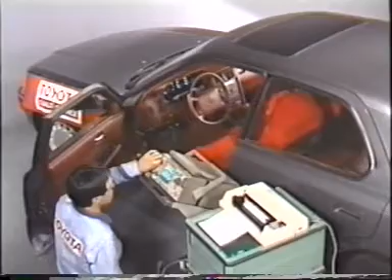Electronics, the science that plays a leading role in the progress of modern civilization. Most systems in a modern automobile include microcomputers that control them very precisely to enhance the car's drivability and reliability. These systems are controlled so closely with each other that it is essential for service personnel to fully understand the electrical systems used in the car and to perform troubleshooting jobs accordingly.

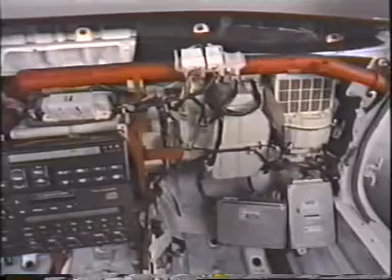This video is designed to help you understand the body electrical system and the principles of troubleshooting by using some of the electrical systems found in the LS400 as examples.

First, we will study the major wiring system and how to read electrical wiring diagrams. Then, we'll learn about the SRS airbag system, the memory system, the wireless door lock remote control system, the theft deterrent system, and the combination meter in that order. For each system, we'll first learn how the particular system operates, the key points of the system, and then the method of troubleshooting that system. Some troubleshooting repair methods will also be explained.

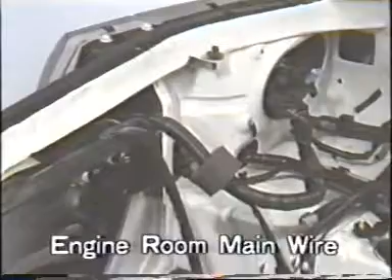We will start with these four major wiring systems. This is the main wiring harness in the engine compartment. It is connected to the fusible link box, junction block number 2, headlights, water temperature switch, engine hood courtesy switch, horns, etc.

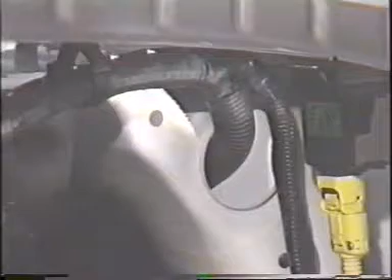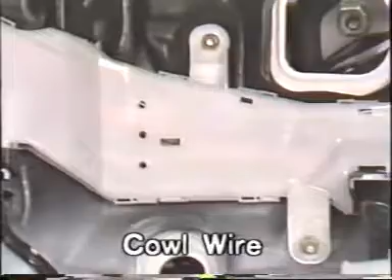This is the cowl wiring harness. It is connected to the front airbag sensors, theft horn, the mirror ECU, theft deterrent and door lock control ECU, tilt and telescopic ECU, center airbag sensor assembly, junction block number 1, junction block number 4, ignition switch, etc.

This is the instrument panel wiring harness. It is connected to the combination meter, rheostat, mirror ECU, luggage compartment door opener, remote control mirror switch, wireless door lock main switch, air conditioner control assembly, radio and tape player, junction block number 3, etc.

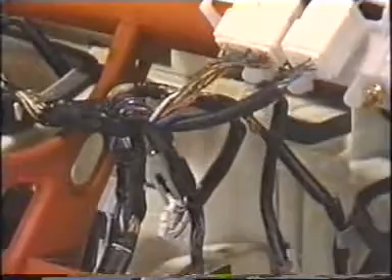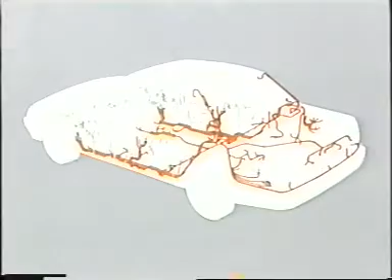And this is the floor wiring harness. It is connected to the O2 sensors, fuel pump, fuel sender, fuel lid opener solenoid, wireless door lock ECU, luggage compartment door lock solenoid, CD automatic changer, door courtesy switches, etc.

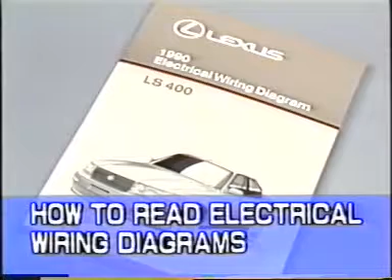Next, we'll see how to read the electrical wiring diagrams for the LS400. Suppose you wish to inspect the SRS airbag system. First, look at the items under the heading System Circuits, and look for the item SRS airbag. On the page indicated, you'll find special precautions about checking the airbag system, as well as the circuit diagram for that system.

On the diagram, you will find numbers and letters indicated. For example, 19IH3. The box itself indicates a connector joining wire harness to wire harness. The letter I indicates the connector is located near the instrument panel. H3 is a code that identifies the connector. The number 19 at the left side of the box is the pin number of that connector.

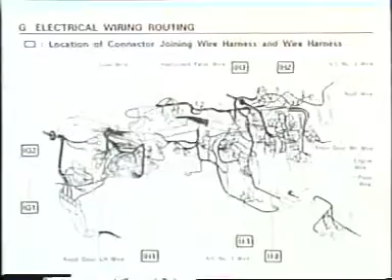Looking at the page following the wiring diagram, you'll find a reference to the page that shows the location of the connector, plus an explanation. Then, by turning to the page indicated, you can easily locate the position of connector IH3 on the body.

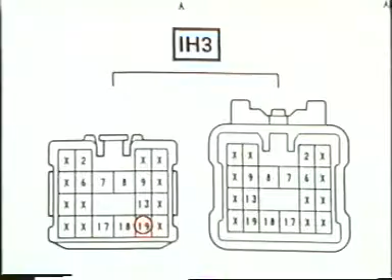On the following page, you will find the illustration of the connector, together with the pin numbers of the male and female connectors. Pin number 19 is located here and here. As you can see, pin 19IH3 is located here. Reading electrical wiring diagrams is easy when you refer to the vehicle carefully.

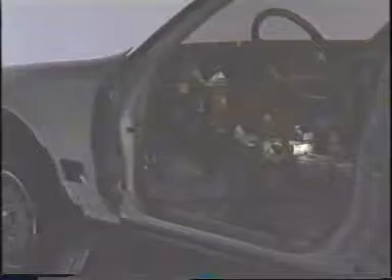Used in combination with the seatbelt, the airbag system is designed to protect the driver in case of a frontal collision. This system is controlled by the center airbag sensor assembly. This is the center airbag sensor assembly.

The spiral cable and the squib are located on the actuator side of the system. The system includes the front airbag sensors and also the safing sensors and center airbag sensor, which are located inside the center airbag sensor assembly. The system also includes a diagnostic circuit and memory circuit that are used to detect a system malfunction.

Connectors between these components shown here are designed especially to ensure utmost reliability of the system. A special mechanism called the terminal twin lock mechanism is used for all these connectors. The key element in the terminal twin lock mechanism is a wedge-like spacer that ensures terminal connection.

The connectors shown here include an airbag activation prevention mechanism. When any connector is disconnected, the short spring plate in the airbag activation prevention mechanism closes the circuit on the squib side to prevent electricity from flowing to the squib. This is the short spring plate.

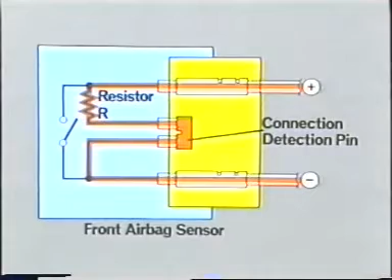These connectors have an electrical connection check mechanism. When any of these connectors is connected correctly, the connection detection pin makes the contact. This permits a very small amount of electricity to flow to the center airbag sensor assembly through resistor R to check the connector mechanism for its connection condition or open circuit. This is the connection detection pin.

These connectors have a connector twin lock mechanism. Connectors with the connector twin lock mechanism are locked in 2 steps to ensure that they are connected correctly at all times. When you are inspecting or troubleshooting the airbag system, you must remember which type of mechanism is used in each connector.

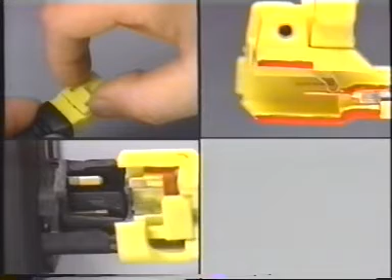Now, let's assume that the airbag warning light is on and stays on when it should be off. Let's see how troubleshooting is done in this case. If the system is functioning properly, the light should go off 6 seconds after the ignition switch is set to the ACC or on position. If the light does not go off at all, it is likely that the center airbag sensor assembly is detecting a malfunction.

So, to check the diagnostic codes, connect terminals TC and E1 of the TDCL. Code 14 is displayed. When a diagnostic code is displayed, you must check if it corresponds to the particular trouble you are checking the system for.

To do so, remove the probe wire from terminals TC and E1 of the TDCL and cancel the diagnostic code once. You can cancel it by removing the ECU B fuse from the junction block number 1 for 10 seconds or longer with the ignition switch turned to the off position. Then turn the ignition switch on and off repeatedly 5 times with an interval of 20 seconds between each time.

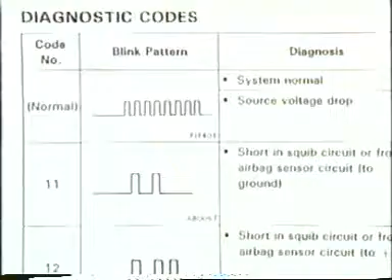Next, put the probe wire again into terminals TC and E1 to reconfirm the diagnostic code. Code 14 is displayed again. This code indeed represents an electrical problem, the airbag warning light that does not go off. Code 14 means that the squib circuit is open.

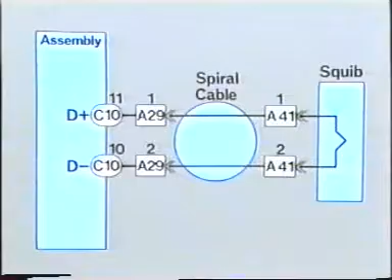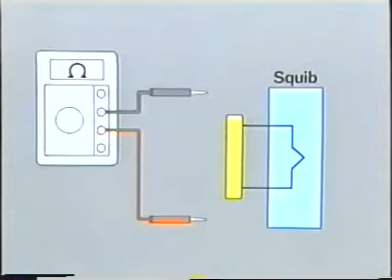Before you begin inspecting the squib circuit, you must first disconnect the negative terminal of the battery and wait for 20 seconds or longer until the backup power source is discharged. You can now begin checking the squib circuit for an open circuit, but remember, never measure the resistance of the squib under any circumstances. This is because if the airbag activation prevention mechanism is not functioning properly for any reason, electricity might reach the squib and trigger it when you measure its resistance.

To check the squib circuit, first separate the connector like this, and then measure the resistance at the spiral cable side. Incidentally, connector A41 is not shown in the electrical wiring diagram because it only connects one part to another part.

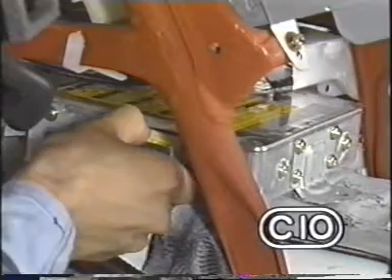Now measure the resistance across the first and second pins of connector A41. If the system is functioning normally, the resistance reading should be 1 ohm or less because of the airbag activation prevention mechanism. But the meter indicates infinity. This is the result of an open circuit between these connectors.

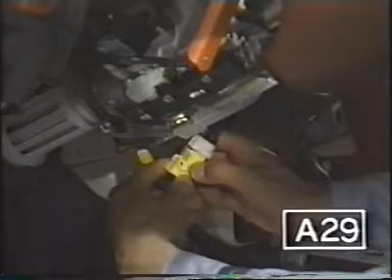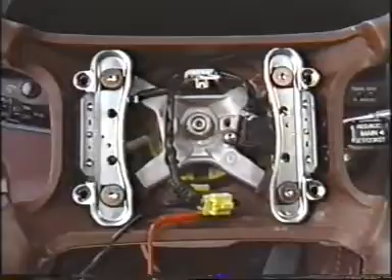The next step is to narrow down the possible cause of trouble. To do so, let's separate this connector and check the resistance again at connector A41 as before. The reading is less than 1 ohm. This means that the spiral cable is all right, so the cause of the trouble is most likely an open circuit in this connector. You can check this by measuring the resistance across the first and second pins of connector A29.

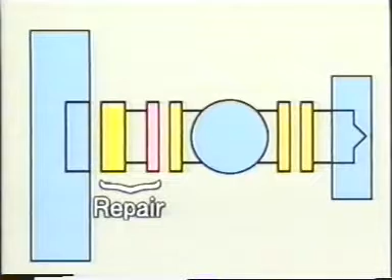The meter reads infinity. This means there is an open circuit in this connector, just as you suspected. This trouble can be corrected by repairing the harness between the center airbag sensor assembly and the spiral cable. Let's quickly look at how to repair the assembly. First, put the two open ends of the wire harness through a sleeve, like this. Then, making certain that the two ends are connected correctly, fasten the sleeve by using a crimping tool.

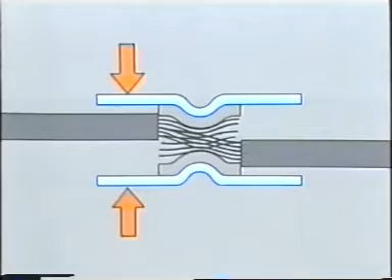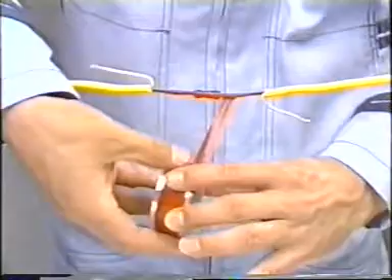To secure and protect the joined connection, ordinary electrical tape and silicone tape are used. First, thoroughly wind the silicone tape over the connection. Then, wind the taped connection with ordinary electrical tape. If the connector is damaged, as seen on the left, replace it with the new one as seen on the right.

When this is done, check the diagnostic code again. Code 41 is displayed. This code indicates an old trouble. When a new trouble is corrected and the power is turned off, the trouble code disappears and code 41 is stored in memory. This code is stored in a non-volatile random access memory and remains in the memory even after the battery is disconnected.

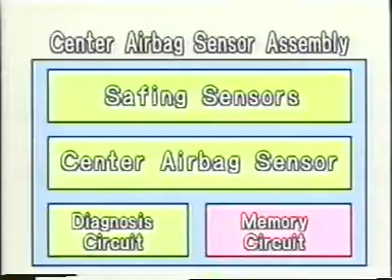To cancel code 41, set the ignition switch to the on position and connect service wires to terminals TC and AB of the TDCL. Then alternately ground these two terminals to the vehicle's body, starting with terminal TC. Ground them twice each, and finally ground terminal TC to the body a third time. Code 41 is now canceled, and the airbag warning light will start flashing after several seconds. Let's check the diagnostic code once again. If the airbag warning light indicates that the system is functioning normally, troubleshooting has been completed successfully.

Here's an important point to remember during airbag inspection. If you should need to disconnect the power cable from the negative terminal of the battery for any reason, you must check the memory settings of the audio system in the car and record them, because all the memory will be canceled as soon as you disconnect the cable.

The memory system is used to memorize positions of the tilt and telescopic steering, outside rear view mirrors, the power seat, and the seatbelt anchorage, and to perform a return operation when requested. This system is controlled by the tilt and telescopic steering ECU, mirror ECU, and power seat ECU.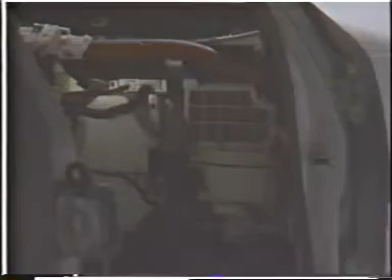This is the tilt and telescopic steering ECU. It also controls the seatbelt anchorage position. This is the mirror ECU. And this is the power seat ECU. These three ECUs have manual switches. By using these switches, you can operate them independently from the memory system.

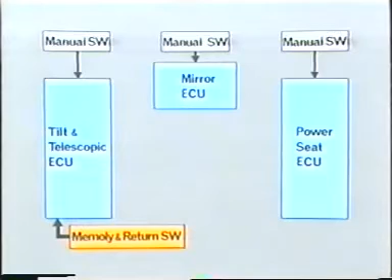By operating the memory and return switch of the memory system, the driver can control the tilt and telescopic steering ECU, the outside rear view mirror ECU, and the power seat ECU. This is achieved through a memory or return signal and a reply signal. You can troubleshoot the memory system quickly and accurately if you fully understand the relationships between these three ECUs and related electrical wiring diagrams. We will now perform troubleshooting of some sample problems in order to study troubleshooting techniques.

When you press the memory return switch, the outside rear view mirrors and the power seat are adjusted to the programmed positions, but the tilt and telescopic steering and the seatbelt anchorage do not return. In this situation, it is safe to conclude that signals to the mirror ECU and the power seat ECU are functioning normally. You must then determine if the steering shaft and the seatbelt anchorage positions fail to return due to a malfunction of the memory system. You will know the answer when you operate them by using the manual switches.

The tilt and telescopic steering does not move at all. The seatbelt anchorage position does not move either. It is most likely, then, that the problem is in the tilt and telescopic steering system and not in the memory system. None of the three motors, the tilt motor, the telescopic motor, or the seatbelt anchor motor, are working at all. When you examine their power sources, you will find that all three motors are connected to the positive terminal of the battery via 4T14.

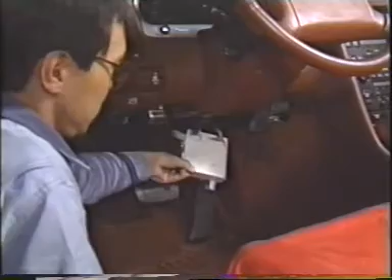The next step is to measure the voltage across +B, 4T14, and ground, 7T14, to check if the positive battery signal is reaching the computer. The reading is 0 volts. It appears that the positive battery signal is not reaching the computer. Next, let's check the voltage across +B, 4T14, and body ground. The reading is 0 again, and you now know for certain that +B is not reaching the computer.

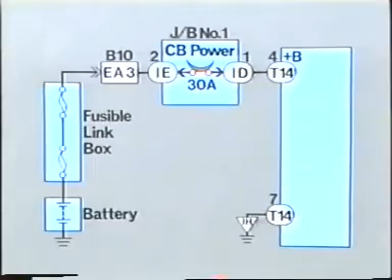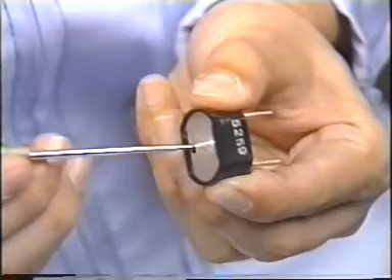Let's check the 30 amp circuit breaker in junction block number 1 for continuity. The meter reads infinity. This indicates a lack of continuity, and this is why +B was not reaching the computer. So let's reset the 30 amp circuit breaker and check if the system functions normally now. If the breaker opens again, recheck the system to find why it opened and correct it accordingly.

In this case also, as in problem number 1, the tilt and telescopic steering and the seatbelt anchor positions do not adjust when you press the return switch. When you operate them using the manual switches, the tilt moves a little and stops before it reaches the desired position. But the telescopic adjustment functions normally. The seatbelt anchorage position is adjusted correctly also.

We learned a while ago that the tilt, telescopic, and seatbelt anchor motors are powered by the same power source. Since the telescopic motor and the seatbelt anchor motor operate normally, you can assume that the power source itself and the ground are all right. This leaves a strong possibility of a malfunction in the tilt motor or tilt sensor circuit. But since the tilt motor does operate slightly when it is controlled by the manual switch, the fault is probably in the sensor circuit.

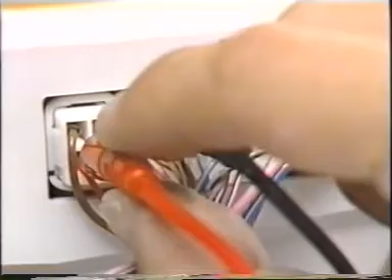Next, let's measure the input side voltage across TIS 7T13 and E1 5T13. Normally, the voltage should be between 0.8 and 4.2 volts, but the meter reads 4.5 volts. The voltage being higher than 4.2 volts suggests an open in the circuit somewhere between the sensor and terminal E1.

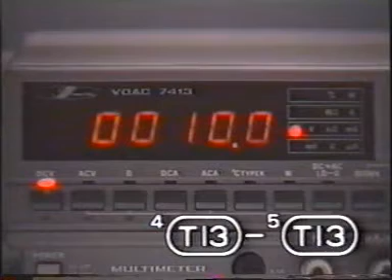You can narrow the problem down further by turning the auto switch on and testing the voltage between output terminal ASW 4T13 and input terminal E1 5T13. When you turn the auto switch on, the meter reading is 10 volts. When you turn it off, the reading drops to 0. It means this circuit is working properly. So if there is an open somewhere, it's probably in here. You can prove it by moving the tilt sensor by hand and see how the voltage changes between TIS and E1.

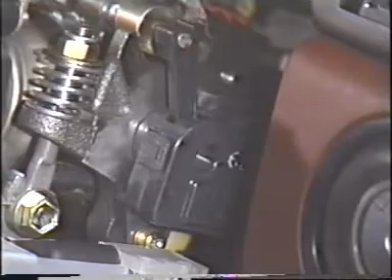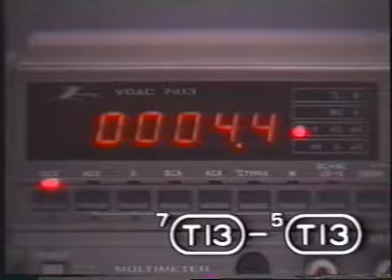Let's move the lever. The voltage changes suddenly from 4.4 to 0 volts and from 0 to 4.4 volts. If the system is functioning normally, the voltage should change gradually between 0.8 and 4.2 volts.

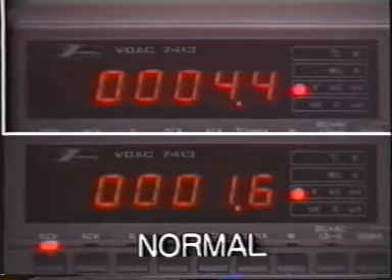Therefore, the open is inside the tilt sensor. This means the tilt sensor must be replaced with a new one. After replacement, you must check the system again. If it functions normally, the repair is completed.

In this final example of problems with the memory system, the power seat position does not return when you press the return switch, although all the other memory systems operate correctly. By operating the power seat manually, you can tell if the problem is caused by a fault in the signal circuit or the power seat itself. The power seat works properly manually. So the problem seems to be caused by a malfunction in the signal circuit.

With the ignition switch on, brake lights off, and the neutral switch in the P range, the outside rear view mirror positions are adjusted automatically by the memory system. Therefore, circuits A and B are fine. This leaves the possibility of an open circuit or short circuit in circuit C or D. Let's check the continuity between SO9T13 and SI8P13.

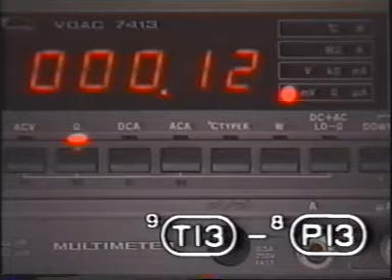The meter reads 0 ohms. This portion is all right. Let's check for continuity between SO17P13 and SI1T13.

The meter reads infinity. This means that there is no continuity. There is an open in circuit D, and the power seat does not return because the reply signal cannot return to the computer. If all the circuits are in normal condition, then the malfunction is in one of the ECUs. Replace them with new ones one by one to check them.

At this point, let's look at normal return signals and reply signals on an oscilloscope. We will see what's happening at 2 points, SO9T13 and SI1T13. As you can see here, during power seat return operation, return signals and reply signals are constantly sent back and forth.

Now let's summarize the key points about inspection of the memory system. First, by operating each system using the manual switches, you can determine if the problem is caused by a malfunction of the memory system or by a malfunction of an individual system. Then you can narrow down the cause of the problem by checking if the input and output of individual ECUs are normal.

The wireless door lock system enables the driver to lock and unlock the door from a distance using radio waves. The wireless door lock system is controlled by the wireless door lock ECU and the theft deterrent and door lock control ECU. This is the wireless door lock ECU, and it is located at the left side of the trunk. This is the theft deterrent and door lock control ECU, and it is located at the back of junction block number 1.

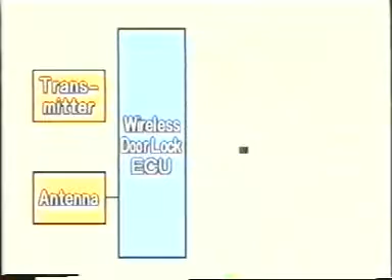Door lock control is normally done by the theft deterrent and door lock control ECU. Therefore, the wireless door lock control system is regarded as optional. As such, when you are troubleshooting a problem involving door lock control, you must first determine if the problem is caused by a malfunction of the door lock control system or by another cause.

And even if the door lock control system is functioning properly, you cannot immediately conclude that the problem is caused by a malfunction of the wireless door lock system. It may be the result of radio interference. The wireless door lock system must be considered as 2 parts: the radio wave system, including the transmitter and other components, and all other components and circuits.

Now, let's look at some actual troubleshooting. In this example, the wireless door lock system does not function at all. If you encounter this type of problem, you should first check if the door can be locked and unlocked using the key. It's working normally. This means the door lock control system is functioning properly. So the problem must be caused by radio interference or a malfunction of the wireless door lock system.

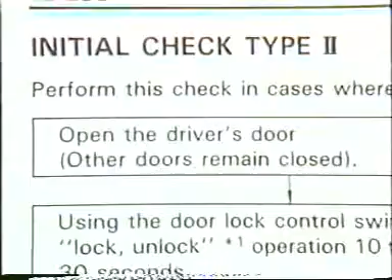We will explain here how the Type 2 initial check is done. First, open the driver's door only. Then, using the door lock control switch, lock and unlock the driver's door 10 times repeatedly within 30 seconds. Then, immediately after this, press the transmitter switch and keep it down for 10 seconds.

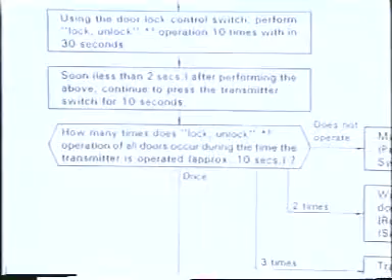While you are holding down the transmitter switch, count how many times all doors lock and unlock during the 10-second period. If the doors do not lock or unlock at all, it means a malfunction on the vehicle side. Malfunction on the vehicle side means that the problem is not caused by radio interference or by a malfunction of the radio wave circuit in the wireless door lock system.

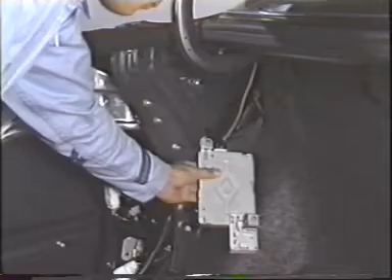We will now begin inspection of the input and output of the ECU, starting with the power source to the ECU. First, we measure the voltage between plus B, 1W9, and the body ground. The meter reads 12 volts, which means the power source is normal.

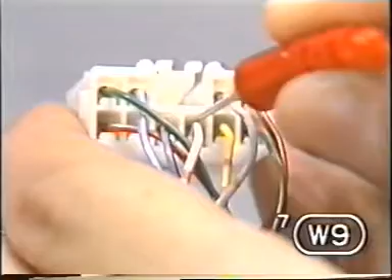Let's check the continuity of the ground circuit next. We measure the resistance between E7W9 and the body ground. The reading is 0 ohms, which is normal. So far, we have discovered that the power source and ground are in good condition.

Now, the failure of all the doors to lock and unlock may be caused by a malfunction of the circuit that forms the ground on the wireless door lock ECU side, so that the doors are locked and unlocked by the theft deterrent ECU.

With the ignition switch set to the on position, let's check the lock control first. The lock control is functioning properly if the voltage at SWL5W9 is 12 volts. The meter reads 0 volts. The lock control is not functioning properly.

We check the unlock control next and measure the voltage at SWUL4W9. The meter reads 0 volts. The unlock control is not working properly either. It is likely that there is an open in both circuits, or one of the connectors is faulty.

Since both circuits share connector BQ2, which is located in the left-hand cowling, it's very likely that the problem is caused by a defect in this connector. Let's inspect it. See, a pin is disconnected. This is why the necessary grounding was not formed and the door lock and unlock control did not function properly.

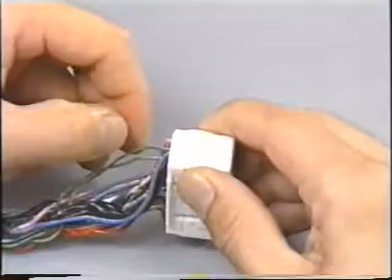Push the pin in and put the connector back. The system works normally now. We checked the voltage at SWL and SWUL with the ignition on because there is always a constant flow of current for a consistent reading. If the ignition is off, the reading will be inconsistent.

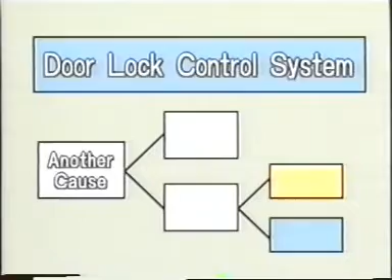Let's summarize the key points in the wireless door lock system inspection. You must determine if the problem is caused by a malfunction in the door lock control system, or by radio interference, or by a malfunction in the wireless door lock system. This is the first step of the inspection.

The theft deterrent system is designed to discourage theft by sounding a horn and cutting the starter circuit. When all doors are closed and locked, either by the door key or the wireless door lock system, the indicator light goes on. After 30 seconds, the light begins flashing, indicating that the theft deterrent system is set. If someone opens a door without using the key, the horn sounds automatically, and the starter circuit is cut at the same time.

This system is controlled by the theft deterrent and door lock control ECU. This is the theft deterrent and door lock control ECU. The theft deterrent ECU has two modes, the door lock control mode and the theft deterrent mode. When you are troubleshooting this system, you must determine whether the problem is a result of a malfunction in the door lock control mode or in the theft deterrent mode. Let's see how troubleshooting is done.

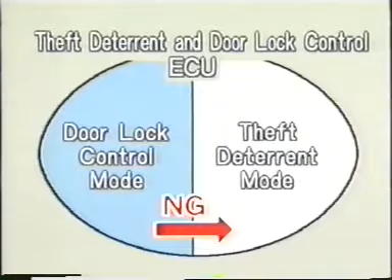In this example, all the doors are closed and locked by a key, but the indicator light does not go on and the system cannot be set. This suggests that the ECU has not switched from the door lock control mode to the theft deterrent mode. Therefore, you suspect a malfunction in the sensor circuit that detects the door operation.

It is possible that one of these switches does not go off when the doors are closed and stays on due to a short circuit. You can tell which one is causing the problem by measuring the voltage at each of these switches with all the doors closed and the ignition switch set to the on position. Let's begin with terminal BKUL 4T10 in the luggage compartment door key operated switch circuit.

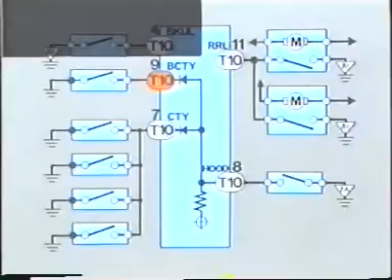The meter reading is equal to the battery voltage. This means this circuit is functioning normally. Let's check the voltage at terminal BCTY 9T10 of the luggage compartment door courtesy light switch circuit. Again, the meter reading is equal to the battery voltage. This circuit is also normal.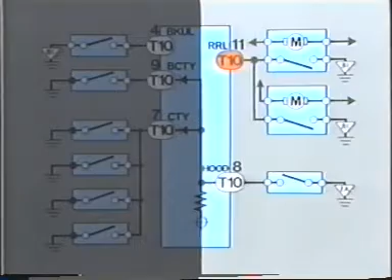We will check CTY 7T10 of the door courtesy light switch circuit next. This circuit seems to be all right also. How about terminal RRL 11T10 of the position switch circuit? Again, the battery voltage is normal.

How about terminal HOOD 8T10 in the engine hood courtesy light switch circuit? Here, the meter indicates 0. It seems that the engine hood courtesy light switch is on at all times.

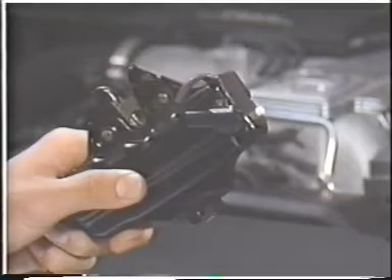Let's remove the switch and check for electrical continuity between terminals 1 and 3. There is continuity between these terminals even when all doors are locked. This is why the theft deterrent system could not be set.

In the second problem, the starter motor does not operate at all. In this case, you should not jump to the conclusion that the cause of the problem is a malfunction of the starter circuit. This is because, in the case of the LS400, the engine starting system is closely related to the theft deterrent system.

As this circuit diagram shows, the starter relay is grounded to the ECU so that the ground circuit becomes open when the theft deterrent system is activated. In other words, you must determine first if the problem is in the engine starting system or in the theft deterrent system. This is done by checking the voltage between STT11 and the body ground.

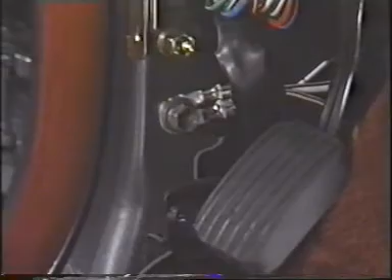If the meter indicates 12 volts, the engine starting system is normal, and you should check the theft deterrent ECU. If the reading is 1 volt or lower, you should check the engine starting system.

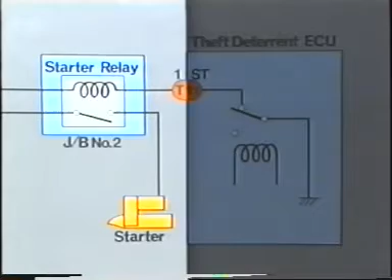Let's summarize the key points in the theft deterrent system inspection. First, you must determine which one of the 2 ECU modes contains the problem. You must remember that the theft deterrent system is very closely related to the engine starting system. In addition, you must fully understand its relationship with the wireless door lock system, as we explained a while ago. Otherwise, you will be taking unnecessary steps during troubleshooting.

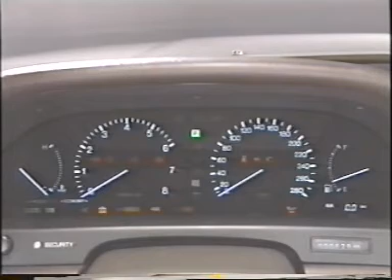For the combination meter, the dial panel uses a cold cathode tube and the needle uses a miniature cold cathode tube. The warning and indicator lights are of the image reflected type. Let's look at an example of troubleshooting and key points in the combination meter inspection.

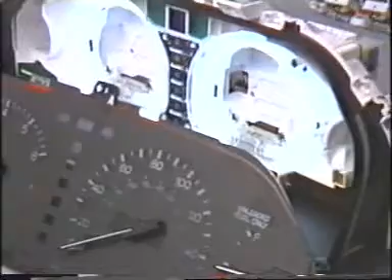We will start with troubleshooting. With this problem, when the ignition switch is set to the start position, all meters come on and remain on. When everything is working properly, the meter lighting is turned off while the starter is cranking the engine so that the engine starts more easily.

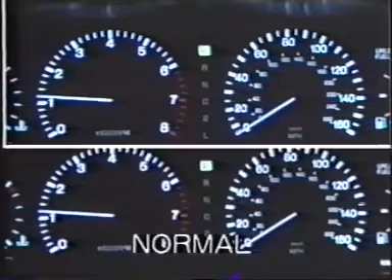Let's examine this mechanism in more detail. Basically, the meter lighting receives electricity from IG1 1C12. While the engine is cranking, the battery voltage is sent to ST2C12 so that the lights go off momentarily.

Let's see now how this mechanism actually works. First, we apply 12 volts to IG1 1C12. This turns the lights on. Now let's apply 12 volts to ST 2C12. The lights go off. They come on again when the voltage is not applied.

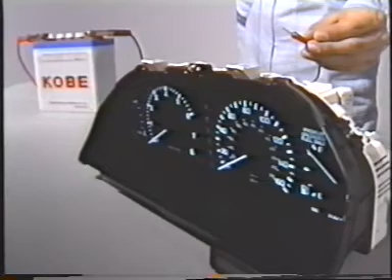Now let's return to troubleshooting. In this case, it is possible that 12 volts is not applied to ST2C12 while the starter is cranking the engine. Let's check the voltage at ST2C12. To do this, you must first remove the combination meter and separate connector C from the meter.

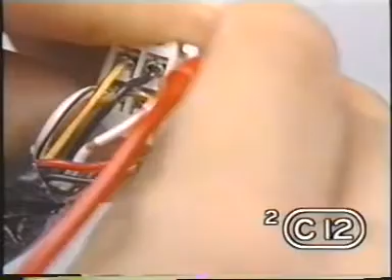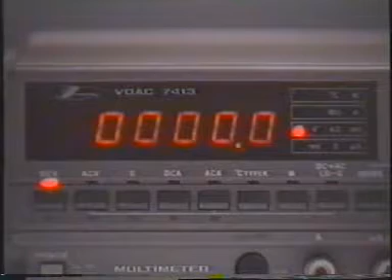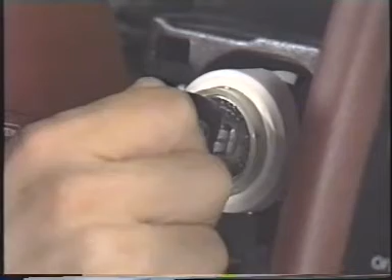Finally, let's review some of the key points in the combination meter inspection. First, you must remember that a high voltage is applied to the combination meter when it is turned on. As you can see, the voltage is as high as 940 volts. Therefore, when you remove the meters from the automobile for inspection purposes, you must be especially careful.

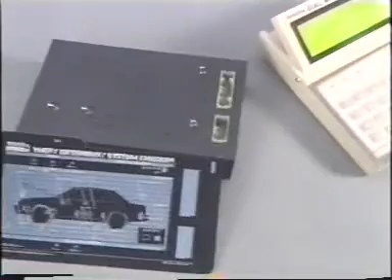In this video presentation, we have explained the key points to understanding the body electrical system and introduced some principles of troubleshooting. For more detailed information, we ask you to refer to the new car features, repair manuals, electrical wiring diagrams, high-tech instruction manuals, and other booklets to increase your knowledge. We also recommend that you make full use of the newly developed checkers, so that with a correct understanding of the body electrical system, you will be able to perform speedy and accurate troubleshooting.